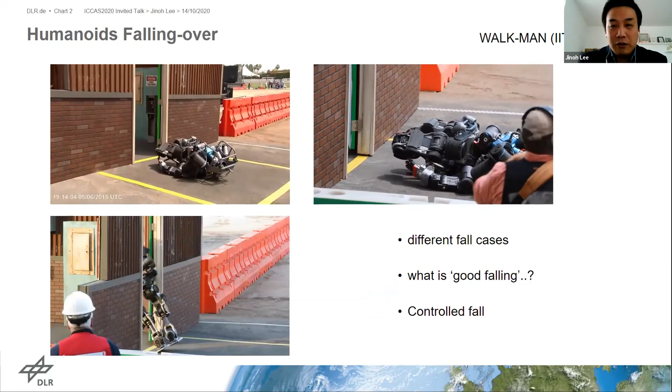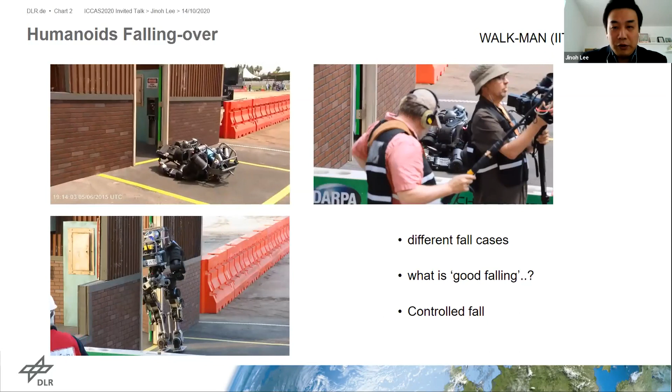Anyway, in fact, this kind of failure is inevitable. In the DARPA Robotics Challenge final, I was a member of the WALK-MAN team at IIT, and as others experienced, our robot had several falls during the trials. You have watched it in many DRC videos, where you see different types of fallover, even in the same robot.

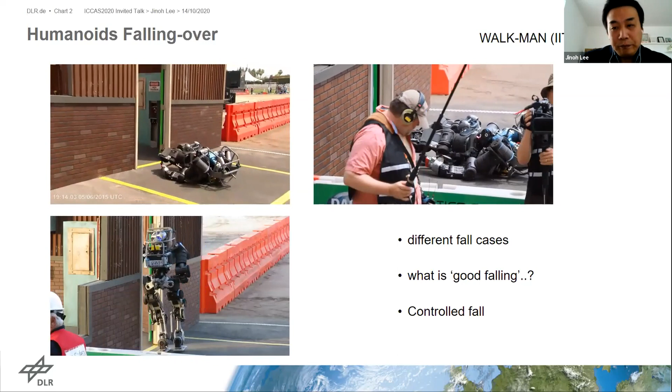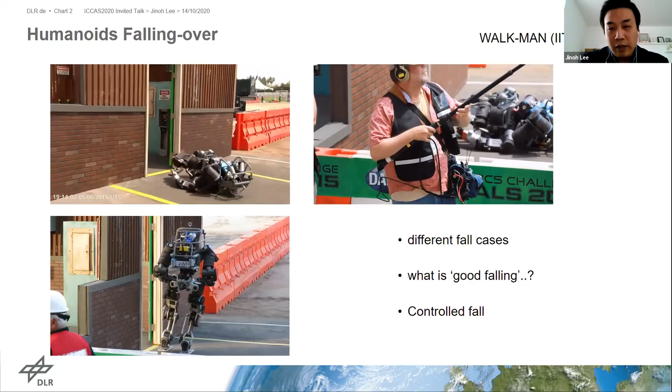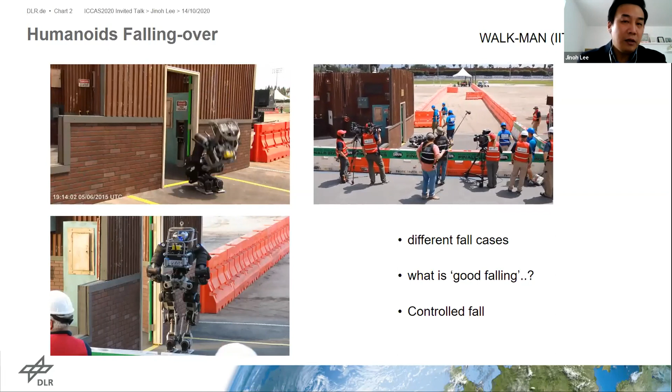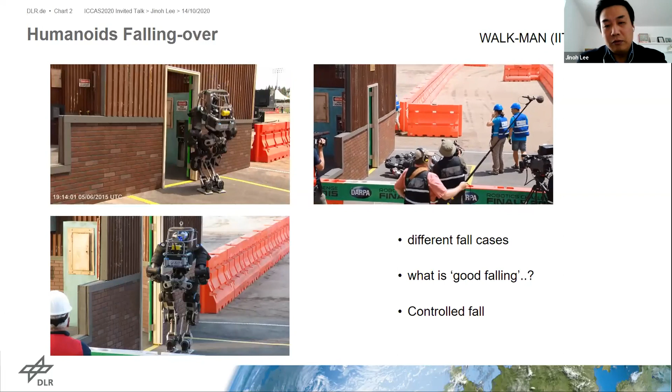One was almost like a free fall, shown in the top video. It happened during the first trial because of a power cut. The other fall at the bottom happened in the second trial, and actually it was still controlled, but it just fell over and lost its balance. The first one didn't damage the robot so much, and we could operate it again for the second trial. But the second fall broke some of the encoders and made a lot of scars on the robot. In that case, since the robot was still in control, it could do some reaction to cope with the fall.

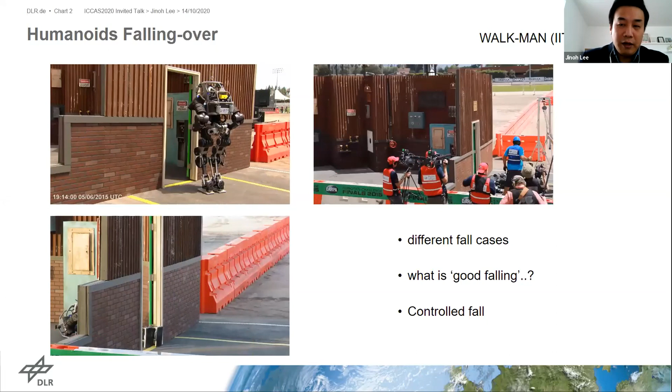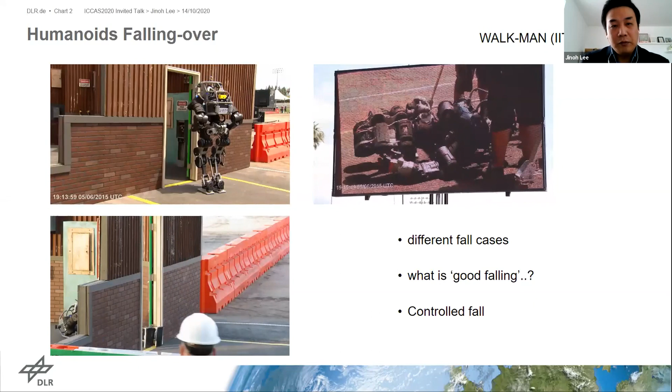But of course we were not ready to do it, like many others. So after this, naturally, I started to think about what would be good falling - something that reduces damage and keeps our operation for the robot going.

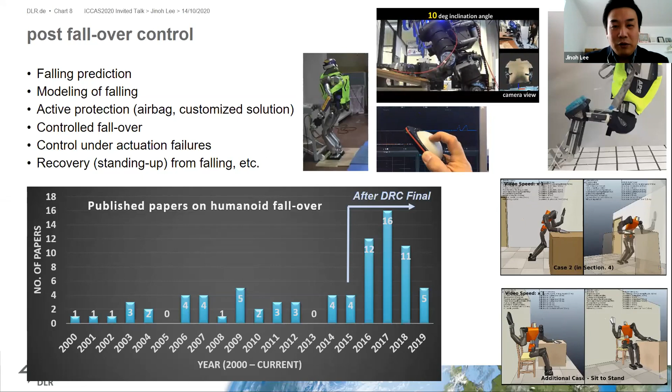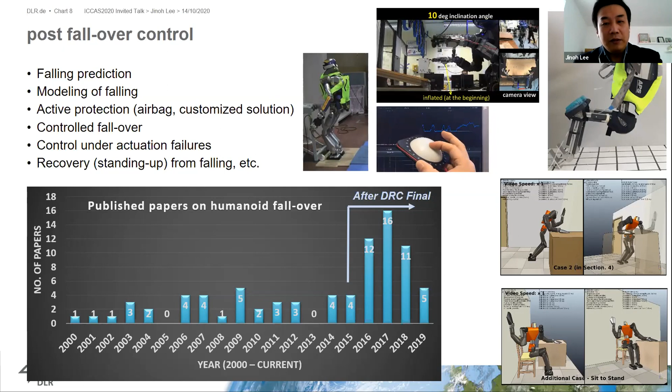It's very obvious, just after the DARPA Robotics Challenge. Those papers cover not only fallover control, but also falling prediction, modeling, active and passive protection developments, and recovery control from the fall. So in this talk, among those topics on post-fallover, I would like to briefly introduce real-time fallover control and recovery strategy.

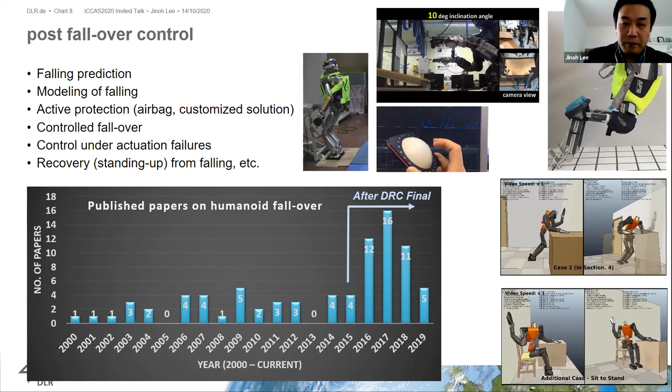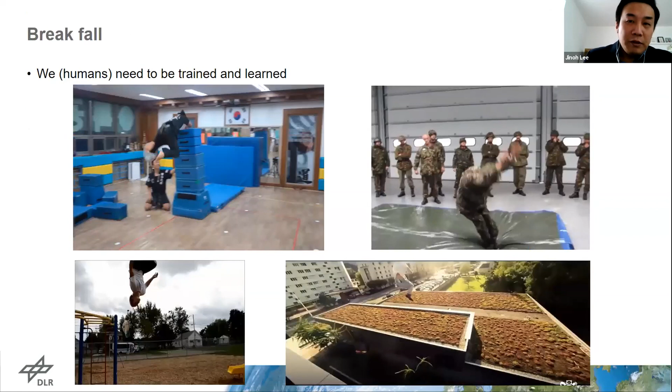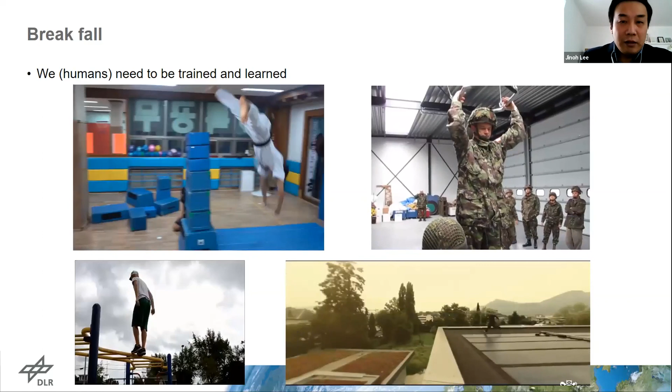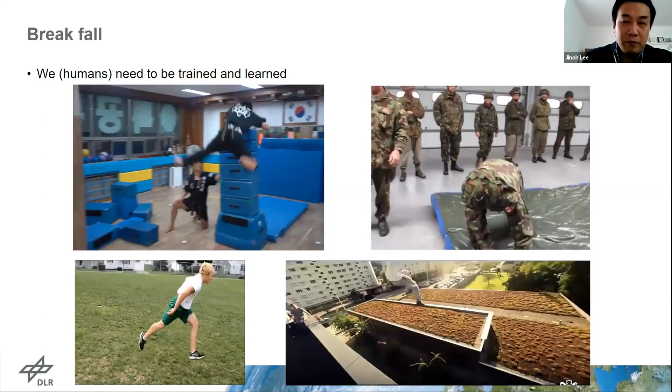To go further, I would like to begin with the term break fall. That is a general term which describes the movement performed to prevent injuries when falling or landing. Break falls were designed by martial artists so that they could practice their techniques without hurting each other. In Japan, the term is ukemi - I think that's a more general term, well known in the martial art aikido.

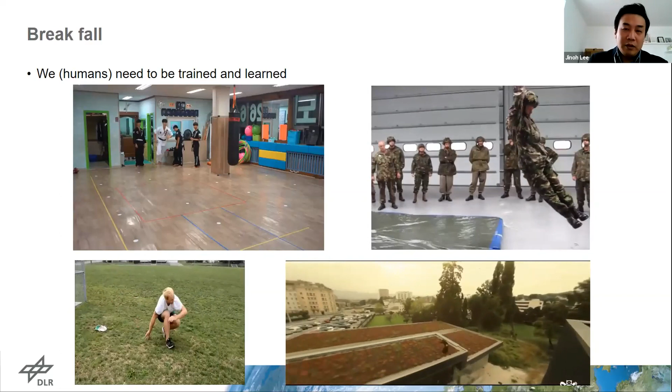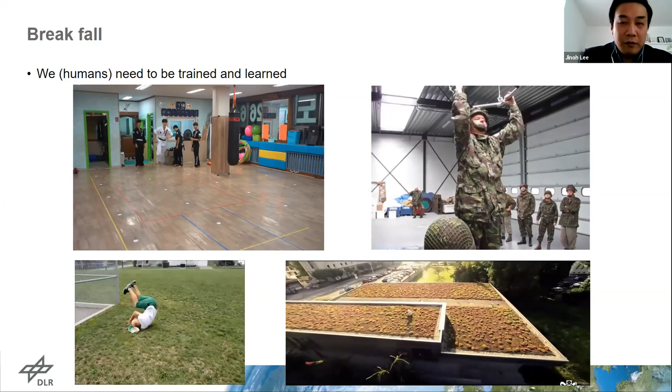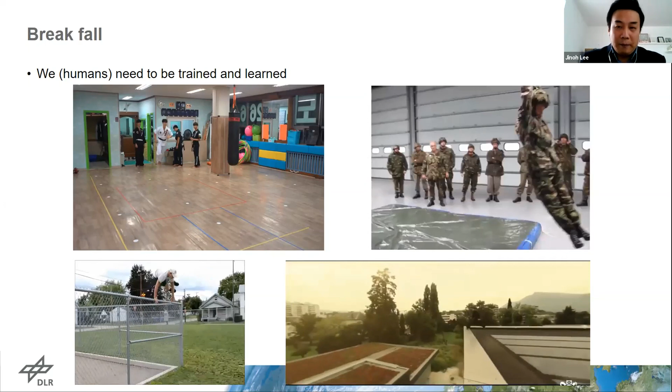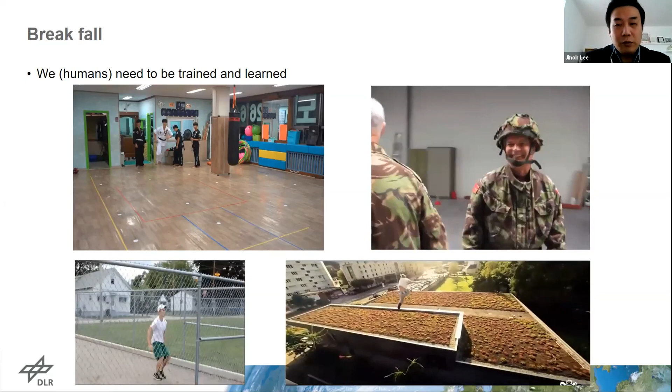You can also find this breakfall technique in many other places - for example, in military drills, you see the video on the right top with parachute landing drills, and on the bottom, some parkour. You see forward and backward falls, extreme cases, but they are all break falls. This is not ordinary falling, but training and learning how to fall. So it's very obvious that the robot should be trained like a human - that is, controlled fall for humanoids.

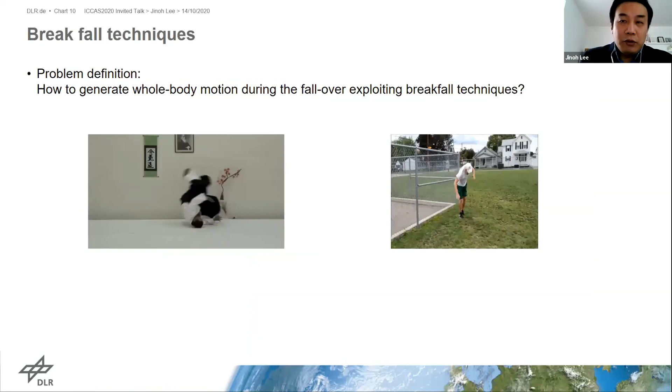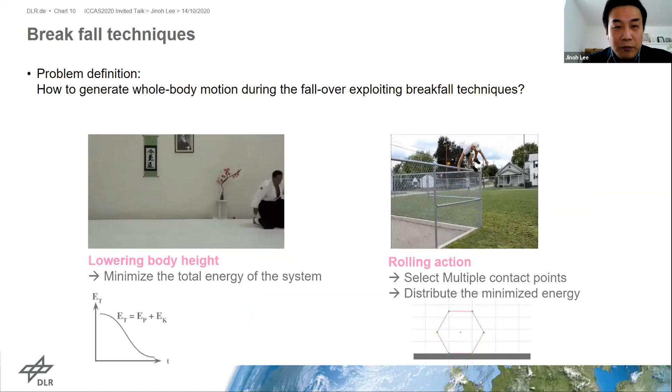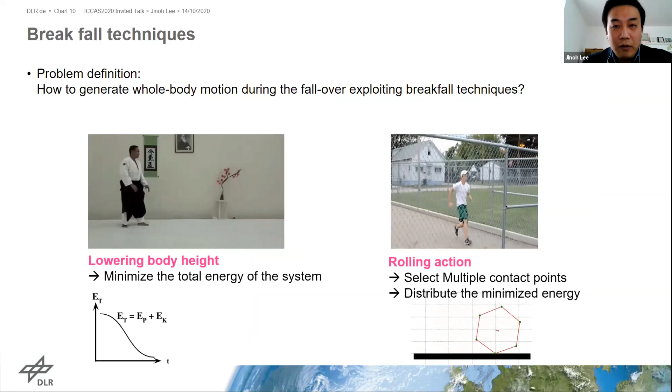So the question is how to generate whole body motion during the fallover, exploiting break fall techniques. By simple observation of the videos, you find two main movements: one is lowering the body height - very basic - and rolling. This means humans try to reduce total energy, that is energy shaping. Rolling motion can distribute energy to multiple contact points and dissipate it by switching momentum into rotational energy. In some cases, this momentum can be created upon landing by diving into a roll, even from a vertical drop. I'll address this later as energy injection.

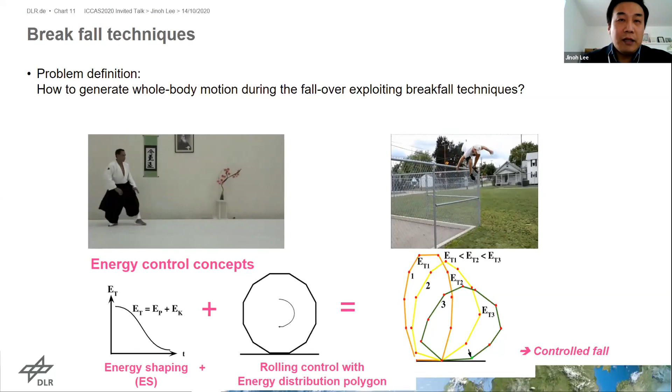For energy shaping, we use a simple LIPM model, since it can represent both tipping and COG lowering motion of the humanoid very well. I'm not going into detail, but the principle of this controller is to monitor the energy of the system online and generate control input to regulate the system to the desired energy level.

From this energy control law, shown in blue, you can compute the difference between initial and desired energy, obtained as E tilde. With a suitable control input, if you design R underscore D, the derivative of E tilde can be made negative, which ensures the energy of the system always decreases. The control input RD is then used for actuating the center of gravity in whole body motion.

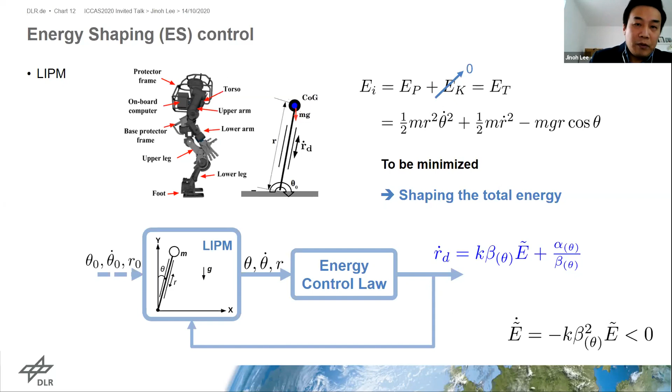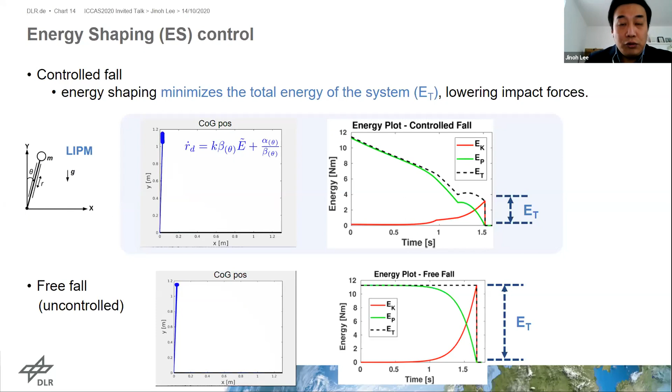With the energy shaping, the controller minimizes the energy and hence lowers the body, reducing the impact forces. As you can see here, the LIPM motion from the energy shaping - at the beginning, because potential energy is very high, it tries to bring it down as fast as possible, resulting in a squatting motion in the humanoid body. Near the end, the kinetic energy starts increasing, so the control law naturally generates a stretching motion in the humanoid body. That is the energy shaping part.

Apart from energy minimization, distribution is also very important. This distribution is made by continuous contacts, which is the rolling motion. The humanoid can be presented as a segmented planar model, which I'm calling SPR, formed with a contact point of interest to the controller - meaning that point could be the hand, elbow, knee, or other places. This model can represent the rolling of the humanoid robot in 2D, but you can also extend it to 3D space with a polyhedral model.

Here, the video at the bottom.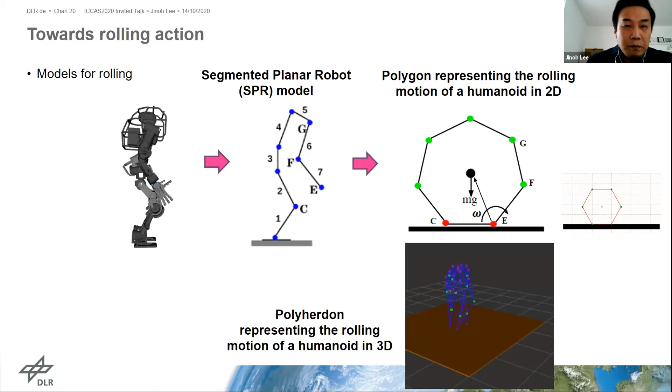When looking into the energy in rolling, we can get some insights from a very ideal condition of circular shape rolling. If we assume ideal rolling, like a non-slippery condition, there's basically no loss of energy, so once we inject energy, the object will continuously roll. But in the case of a polygon, which is the model of humanoids in this case, there is a definite loss of energy depending on the coefficient of restitution at every contact due to the impact. So energy injection is needed to ensure the rolling of the system over multiple contacts.

It's quite an interesting point because when we try to reduce the impact, we try to reduce the energy, but by creating more contact, we can make a better distribution of the energy, and that can eventually reduce the impact forces.

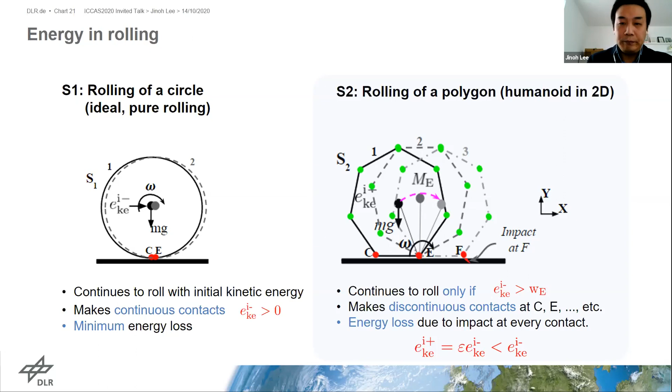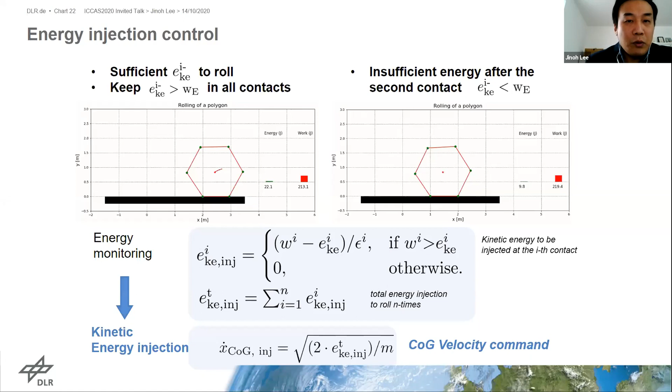We did some simple simulations and confirmed that energy injection can make the system rolling. This energy injection control is used to monitor the energy state online, like before, and to compute the desired energy to make sufficient rolling. Then from the equation at the bottom, we can generate the COG velocity command for making more rolling motion in the humanoid robot.

From the energy shaping control, the energy injection control, and rolling energy distribution, we can make a whole body controller like this block diagram. First we generate a command for the center of gravity from the energy injection and shaping control, then bring it to the whole body inverse kinematic solver. This whole body controller is position-based control, but it's quite efficient to generate the rolling motion as well as reduce the total energy.

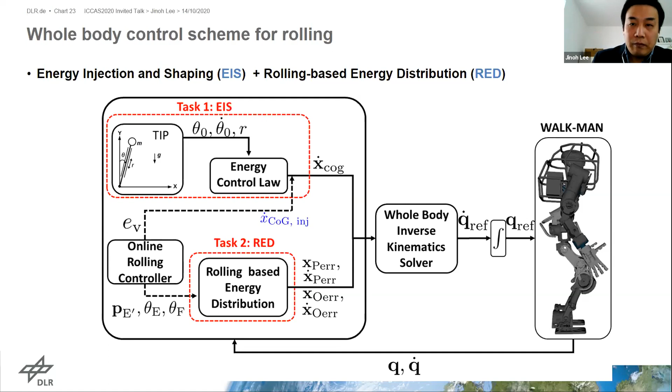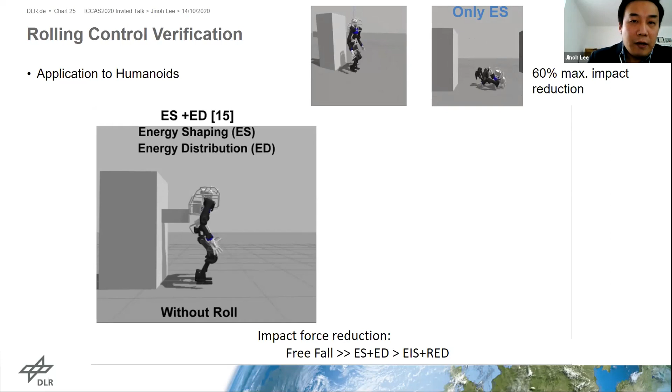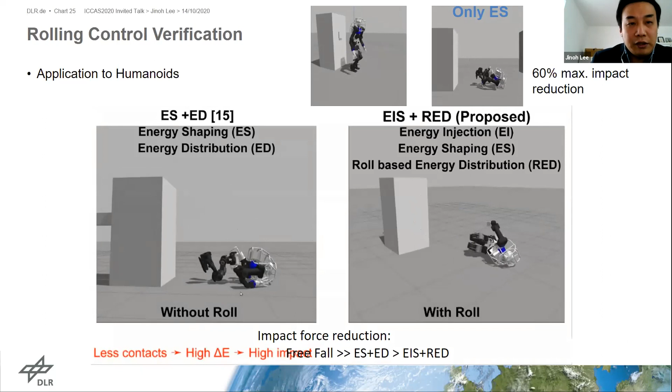The simulation here is done with just falling - a free falling condition. When we use the energy shaping control, there are already certain differences - if you shape the energy, you already get 60% less impact forces. And as you see here at the bottom, if you make more contacts, the energy is distributed and the maximum impact force decreases. If you make a rolling motion, as shown in this figure, you get about 30% less impact forces indeed.

We implemented this controller on other robots. We couldn't experiment on real hardware because of some real difficulty, so we just did some simulations, but the same controller can be applied to other robots. The falling controller is a general control framework to handle arbitrary directional falls, online applicable and adaptable according to the disturbances, as we confirmed.

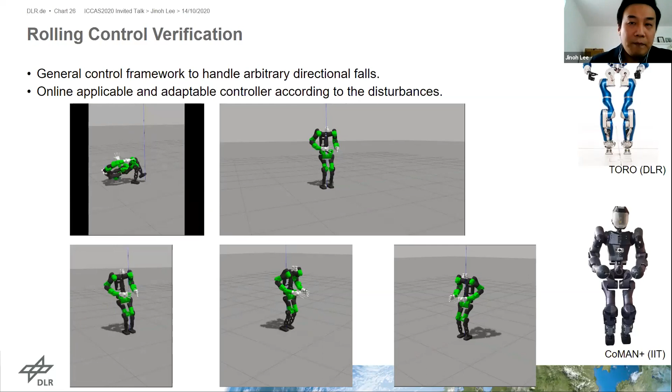Let me quickly move on to the dynamic standing up problem as one of the possible actions. We want to deal with the situation where the robot is impossible to stand up by static motion due to the range of motion, or some needs for quicker recovery from the resting posture.

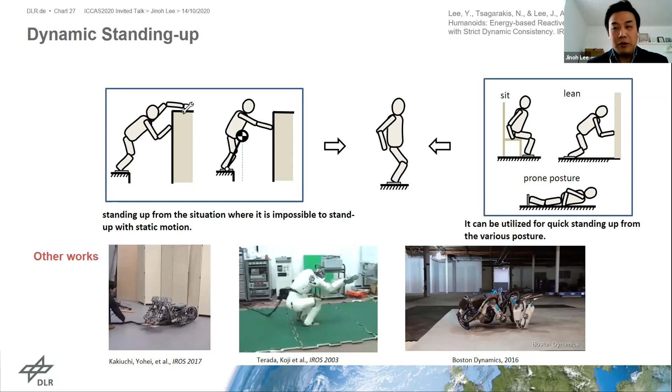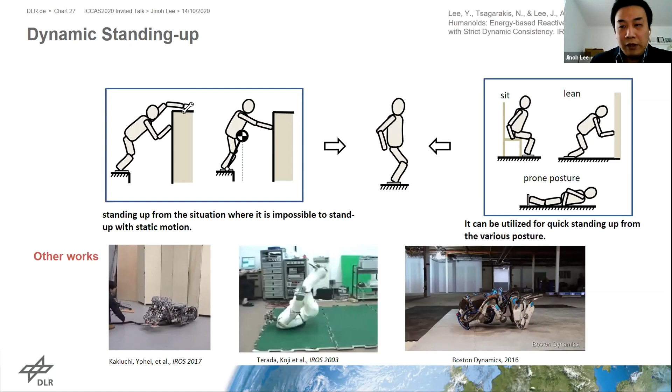There were quite interesting studies from Professor Yohei in Tokyo University, and video from Boston Dynamics, and also you saw some video from Dr. Kajita in his talk. There are some studies, but here our goal is to develop a generic whole body controller for agile standing up.

So for this, the first goal is to control the ground projected position of the center of mass, driving into the boundary of the support polygon of the feet with sufficient height from the ground, as well as guaranteeing stable contacts at the feet. And for more agility, rising motion should be made by pushing forces from the contact.

Similar to the previous falling over control, we develop an energy-based approach with state machine. So here you see pushing, rising, and stand up - three very intuitive phases we can have. Basically, we differently control the center of mass motion, and then we could make an agile standing up motion with a whole body dynamics.

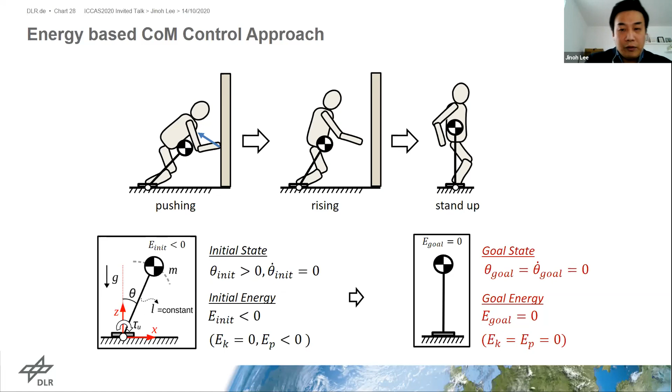Actually, to make a dynamic whole body motion with multi-contacts, basically we have to make the robot satisfy all the inequality constraints. So we develop a QP-based optimization with operational space-based whole body controller.

The energy controller itself is quite simple, but works differently in each phase. So in the pushing phase, basically the controller produces sufficient kinetic energy and potential energy by crouch motion. And then in the rising phase, after making a pushing force, kinetic energy is translated into potential energy with deceleration by commanding center of pressure.

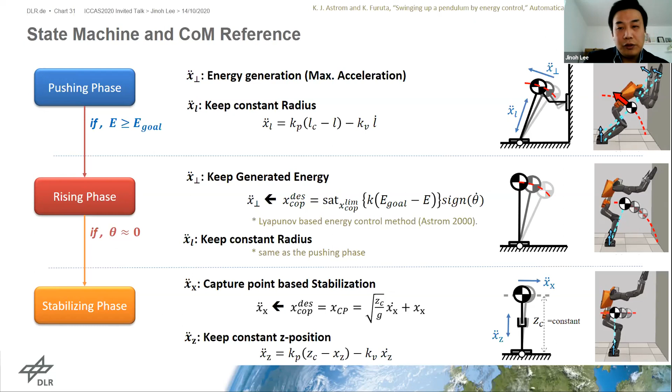And then after rising out, we can just stabilize the robot. You can use any type of stabilizer. In this case, we just use a capture point to stabilize the COM motion.

To create whole body motion, that would be a big question, because this problem is not that easy - we have multiple contacts, and then we have three different phases. So we decided to use the...

operational space-based whole body controller. It's because it's very effective to control hierarchical tasks for robots with redundancy and multiple tasks. And also it can deal with multiple contacts, and it guarantees dynamic consistency. That is really good property for this kind of control.

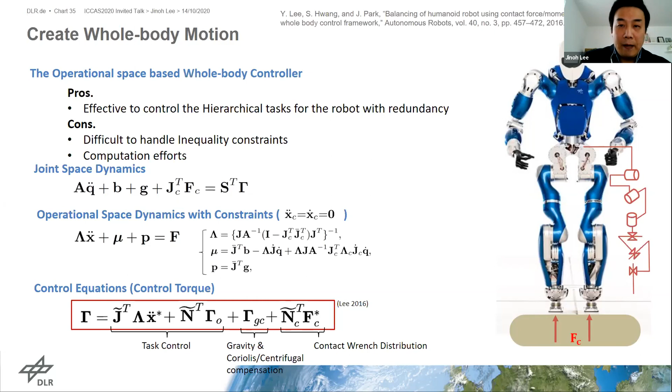But there are some big difficulties to handle inequality constraints in this original form of operational space formulation. And also it takes a lot of computation to get the dynamic parameters. So we developed a new framework, an enhanced framework of the conventional operational space formulation, combining with a QP optimization.

Basically, the hurdle is the computation, because you see here in the block diagram, there is a contact constraint operational space dynamics that does several inverses of huge matrices, and that takes much time to compute those kind of dynamics parameters.

So we developed a multi-threading technique. Actually, we just use a multi-threaded technique, and then in the hard real-time thread, we do all the sensory data acquisition and state estimation, communication, low-level control, and high-level control with a QP optimization.

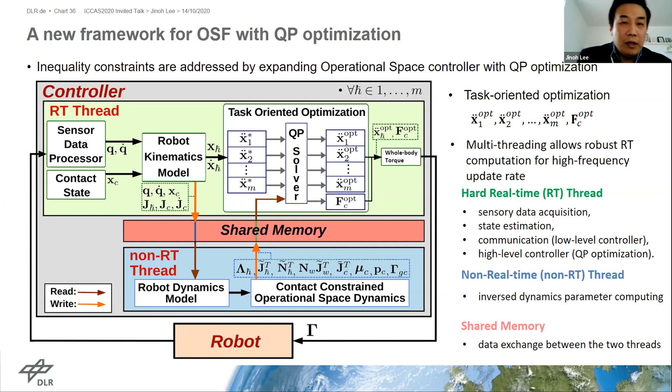And then in a separate thread, there's a non-real-time thread. There we just do the inverse dynamics parameter computing. And with the shared memory, we can share the information from the dynamic parameter to the hard real-time loop.

And then the overall control structure is like this. So when we get the multi-body dynamics model from the robot, then basically the energy-based COM motion controller is working for 3 different phases, and then giving a command to the whole body motion controller as a COM acceleration.

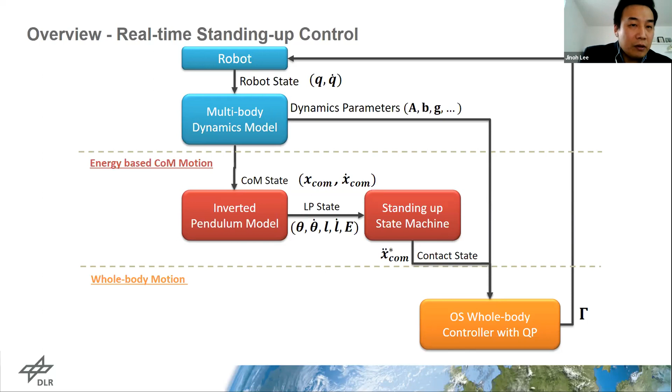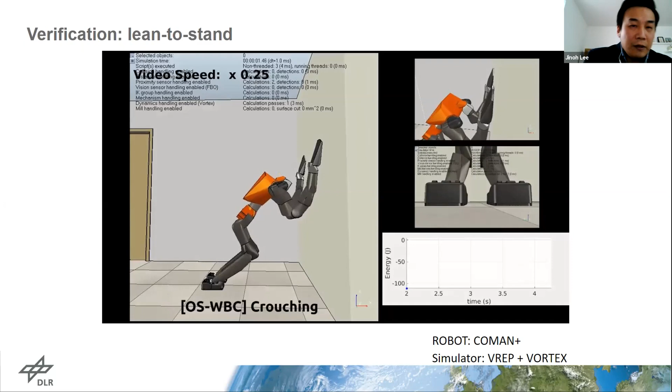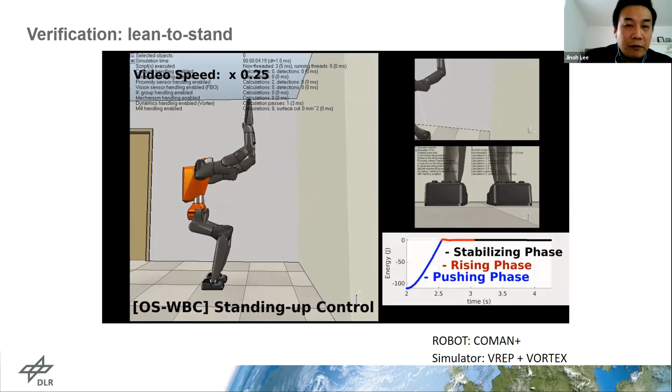So this is a simple study from lean posture to standing. As you see here, the robot has 4 contact points, and you have to deal with this force distribution to make a proper force to push. So from the pushing phase, rising phase, and stabilizing phase, the controller is working properly with the energy concept.

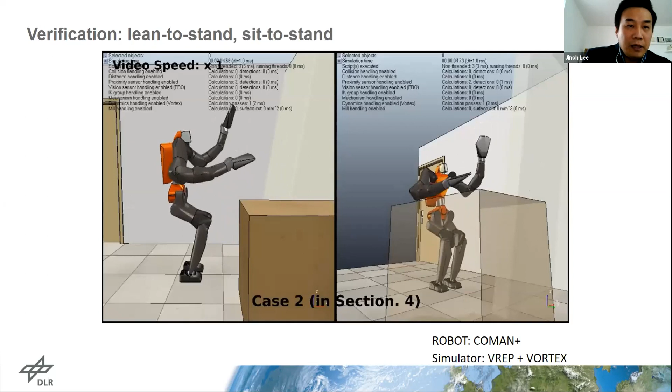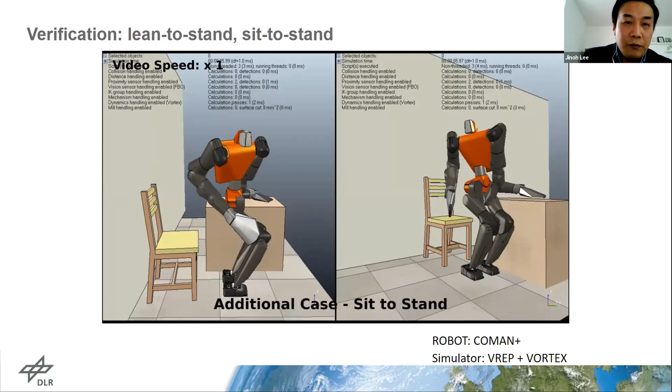And we also try to do the same controller on different postures, like leaning to the wall with more contact, and also different postures like sit-to-stand cases - all work pretty well. So we're saying this is kind of a generic dynamic controller for standing up scenarios.

So I just conclude my talk here, saying challenges and open issues. Basically, to realize this kind of post-falling over controller, there are so many things remaining. For example, simple state estimation sometimes is not really perfect, and that does make a lot of difficulties in implementation. And falling definition, basically...

When we define falling itself, it's a little unclear, because even for humans, we can somehow overcome the falling in a certain condition. Then can we say that is falling or not? And in that case, should our prediction predict that reaction or not, and when do we have to trigger our falling over control - something like that.

And we need very good environmental perception, and also we need a kind of decision making that is related to the falling definition. And also we need good actuation for agile reflex motion and post-impact endurance, and hardware failure. When we get a hardware failure, how can we detect that - do we still have sensing or not, and how do we control the failed actuators and so on.

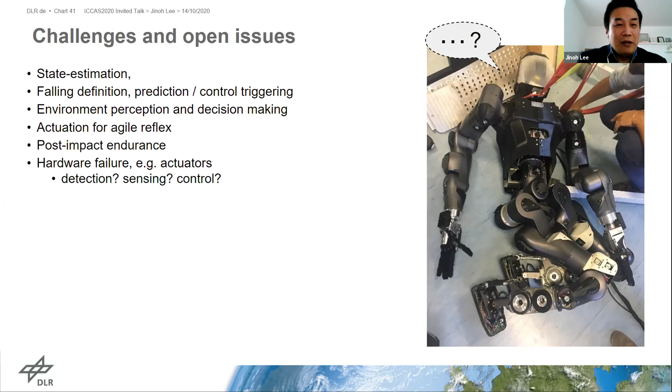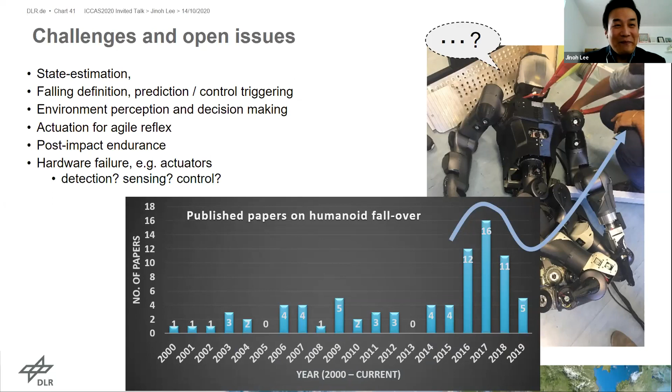So to bridge the gap between reality, of course, we need more study. And I personally wish this graph after 2019 is going up again. Yeah, that's all. Thank you.